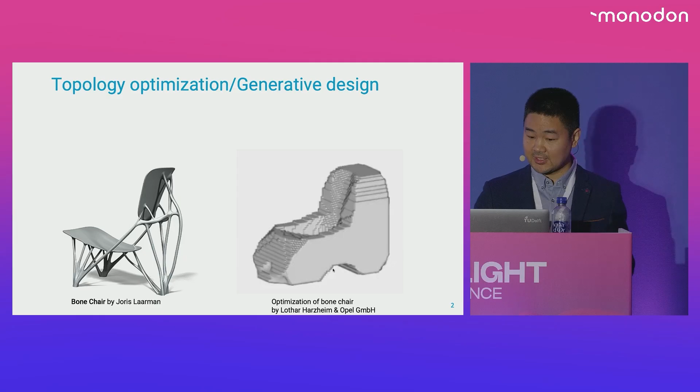So it starts from a solid block, and in this block, he identified where the forces will be applied when a person is sitting on top of it. And on the ground, he specified where the legs should be fixed. And starting from there, the algorithm, in an iterative process, removes material where it is less relevant. At the end, it comes up with a very beautiful organic design. Due to the similarity in the algorithm, to only place material where it is necessary, and also due to the appearance and the similarity to the bone, it is given the bone chair name.

So this is topology optimization, and increasingly in the past decades, because of industry players in this market, it is getting popular with the name generative design to highlight that the design is computed with algorithms instead of manually sketched by the designer or by incremental optimization. So it's a very good example of form follows function, where the function is the performance requirement and the form serves this function. What I find extremely beautiful about topology optimization is that it transforms the manual design process into a mathematical problem, and the mathematical problem is where to place material and where not to place material.

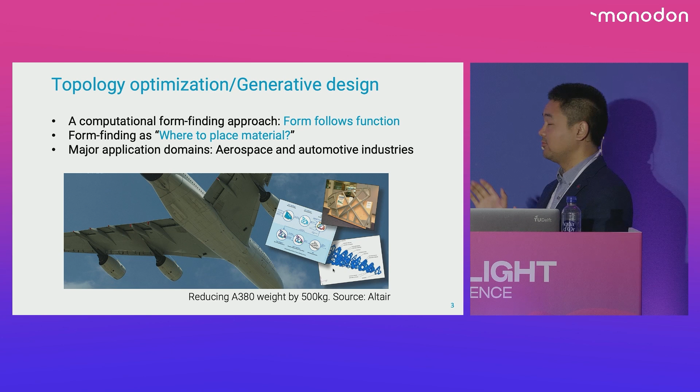These days, if you Google topology optimization plus additive manufacturing or 3D printing, you will find many of this type of organic shapes. They are all designed by this algorithm and produced by additive manufacturing. As Niels introduced, topology optimization has been under intensive development for almost 4 decades, but only in the past 10 or 15 years has topology optimization been really recognized by industry. One of the reasons is, look at these complex geometries, they are very difficult to produce, but with additive manufacturing, it becomes possible. Not without challenges, but it becomes possible.

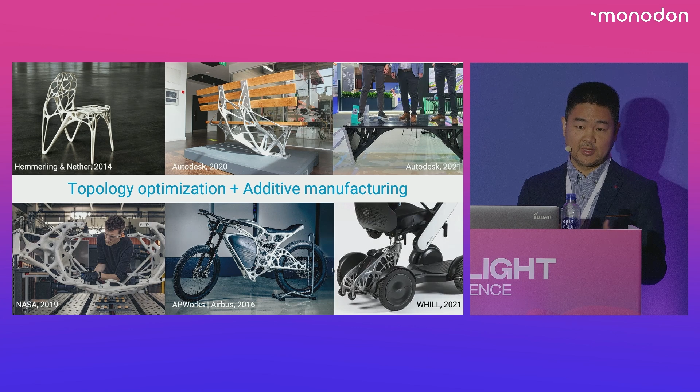If we zoom out from the mechanics part to the product design, we know when we design products, we consider not only the mechanical performance, but also many other factors. For example, how this product is going to be produced, whether it can be produced and how it will be produced, and what kind of materials. And today, let's talk about smart materials and how we can take these material properties into the design process.

And from an industrial design perspective, we also care about user experience. Do people like this design or not? For a component in a car, we probably don't care too much whether it is beautiful or not. But if it is a consumer product, let's say a chair, we do care about whether it is comfortable, whether it is beautiful.

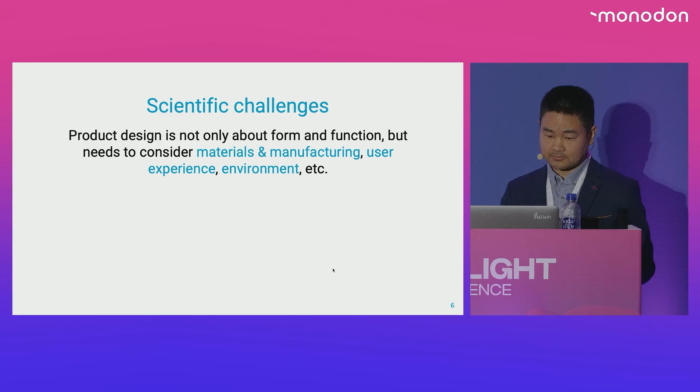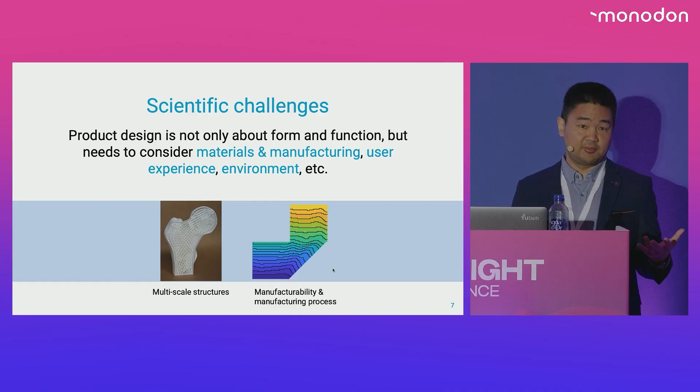My research has been primarily focusing on the design of hierarchical structures, or structures that are composed of microstructures, shown on the left, and this is a multi-scale structure, and also considering manufacturability, whether it can be produced in the intended quality. As two side tracks, I also work on high-performance computing, and here the intention is to support the development of this algorithm in 3D because it becomes very intensive. And the last one is about user experience, whether it looks good.

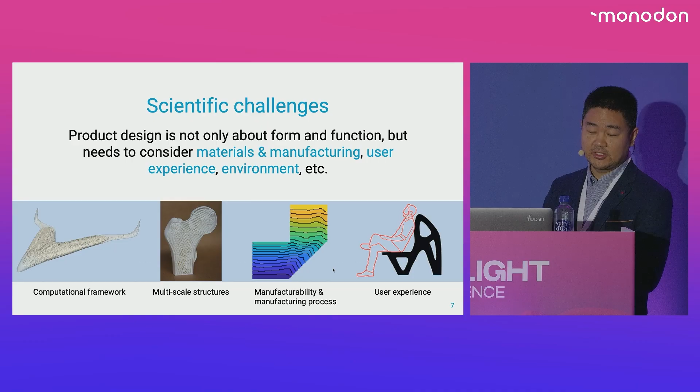So today I'm going to focus on manufacturability and manufacturing process modeling, but before that, I will quickly introduce the other three directions. The first one is about the computational framework. This video shows the computational design and optimization of an entire airplane. We are very much inspired by the effort to optimize the wing, but it's only half of the plane. So here we try to optimize the entire airplane.

And this opportunity is in collaboration with colleagues from the aerospace faculty. They designed a V-shaped blended vehicle. And here we test, if we have this different unconventional airplane layout, how should we design the internal structures? So here we developed this computational framework to get an understanding of how the structures in this V-shaped airplane would look.

Moving on to this human perspective. So here you see two chairs. One of them was designed with topology optimization, and the other one is a slightly modified version. The person sitting on top of it is the same. And my question to all of you is, which one do you find more beautiful? I see people pointing to the left, people left and right.

Yeah, so here, the one directly coming from topology optimization is the one shown on the right-hand side. And the left one is modified by our students who received training on aesthetics, and they know principles. These principles are very difficult to describe mathematically, but they have this understanding. Based on that understanding, they modify the shape.

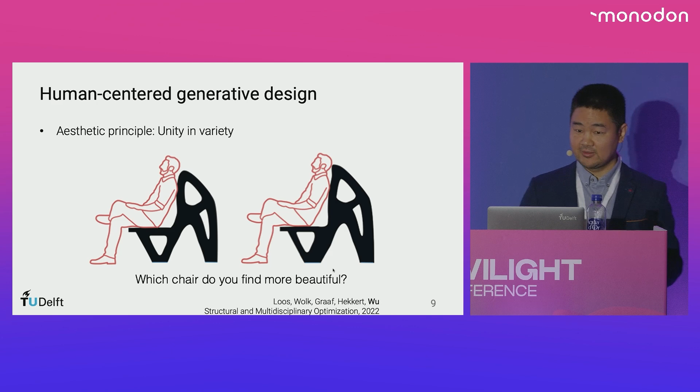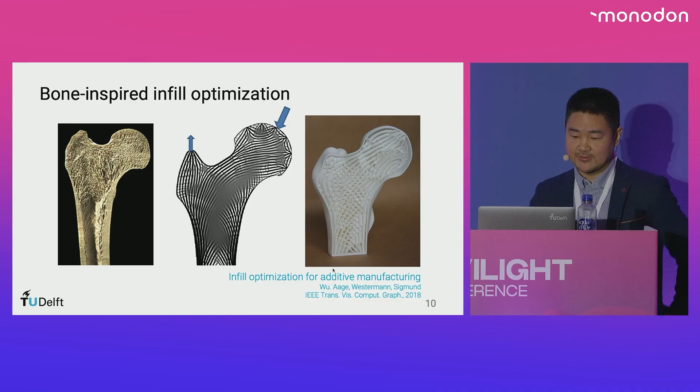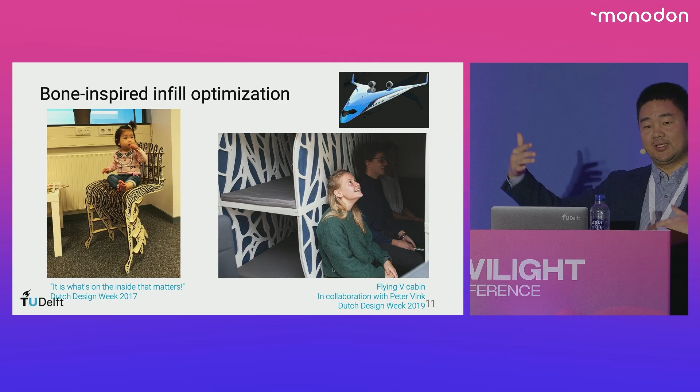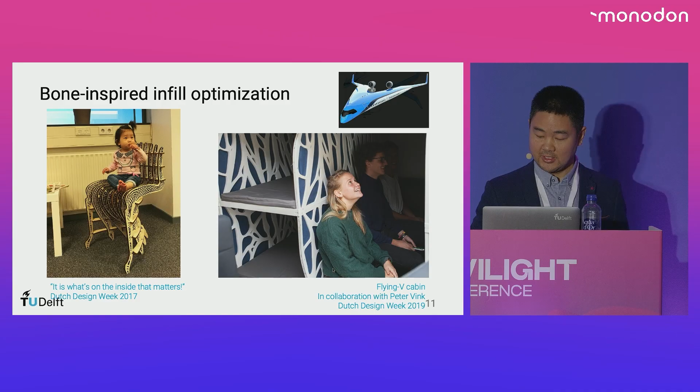It's totally different. On the right-hand side is the application of this algorithm to design the internal cabin of this Flying V concept. And it was exhibited at Dutch Design Week in 2019. In this infill optimization, we have to discretize the geometry with a very fine granularity in order to create detailed geometric details. It is computationally very intensive, so later we had been working on how we can use dehomogenization or geometry-based dehomogenization to more efficiently come up with high-resolution structures.

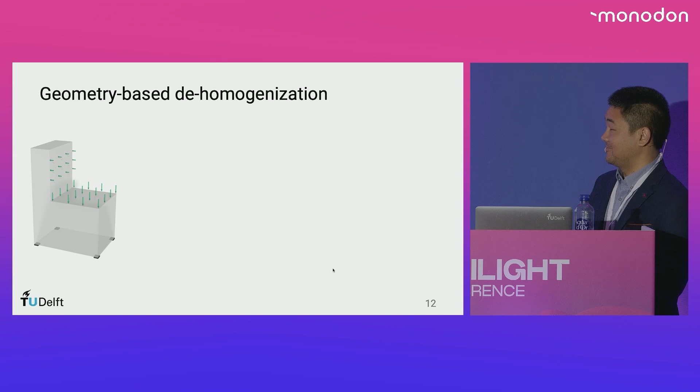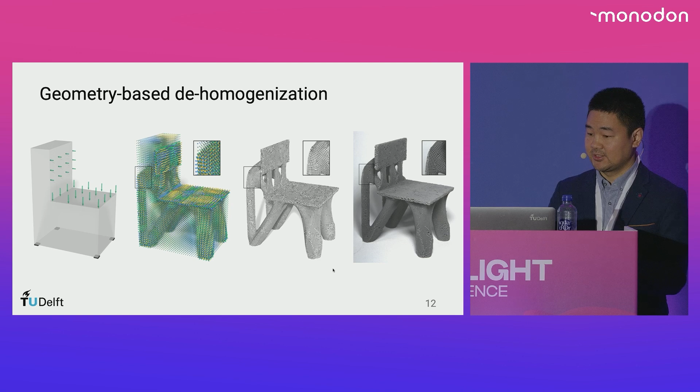Again, an industry design application of a chair. On the left side, it illustrates the mechanical boundary condition, and in the optimization, the optimizer tries to decide where we should place material, and if we place material, in which orientation it should be placed. And here we get a discrete field representing the orientation of cross structures. Then with geometric algorithms, we compile a continuous geometry from the discrete directions. And on the right-hand side is a fabrication with stereolithography.

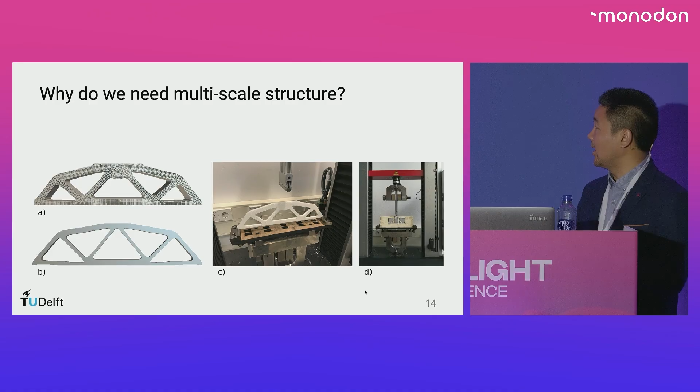An experimental validation on why we need multi-scale structures. So this is a 3-point bending test. On the left side, on the bottom is a standard topology optimization, which is solid, and on the top is this multi-scale or 2-scale structure. And on the right side is the setup of the mechanical test.

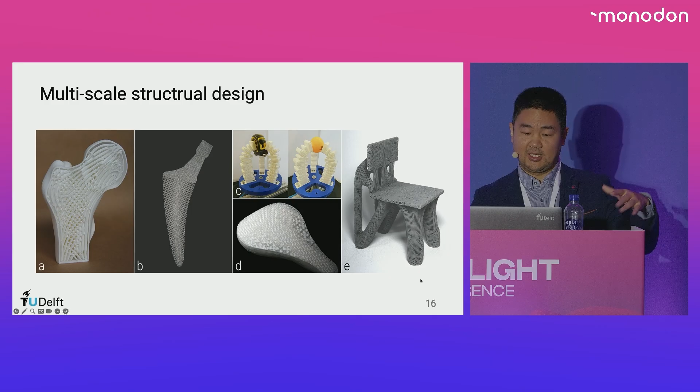Here are some more examples. The second one is the application of topology optimization to the design of an implant. So here we design microstructures that change porosity, and they are well connected. D is a bicycle saddle, where we have designed a geometry which can be printed with extrusion-based printing. On each layer, it is one slice, and across layers, it is self-supporting. And we also worked on a soft robotic gripper. I'll come back to that at the end of my talk.

Now move on to the manufacturing. Much of this research is inspired by recent advances in additive manufacturing, especially in robotic fabrication, where the robots have 5 or 6 degrees of freedom. It can deposit material almost arbitrarily. And this gives a lot of flexibility in the design process, but there are also some unique challenges.

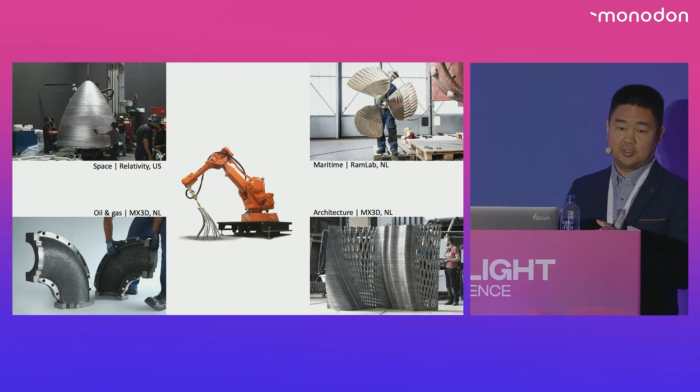So this robotic manufacturing process is a directed energy deposition process. It's called wire arc additive manufacturing. Essentially, it's a continuous welding process using robotic arms. It has been used to design components for industries where you demand large structures of 1 meter or several meters: architecture, space, maritime, and the oil and gas industry. And the Netherlands is pretty strong in this area, and there are 2 industrial partners in the Netherlands specialized in developing this large-scale manufacturing.

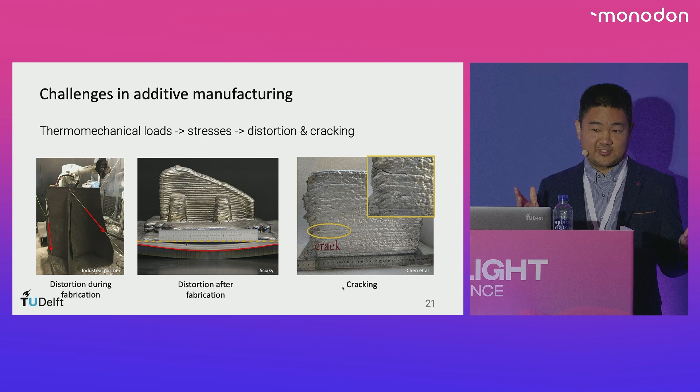It can create distortion, and sometimes this distortion can be so big, the manufacturer has to deform the shape back in order to continue the manufacturing process. And this residual stress can also manifest when the component is detached from the build plate, as shown in the middle. And if it doesn't deform, it doesn't mean everything goes well. It may create a crack or micro crack.

So if we look back into the design of the bridge, normally in design and manufacturing, these 2 processes are decoupled. By decoupled, I mean when we design something, we design a structure, and then we move on to manufacturing, and then we realize it couldn't be produced, or it couldn't be produced with high quality, then we return back to design and modify in order to make sure it can be produced. But even when it can be produced, it doesn't mean there are no defects.

In a manufacturing process, you could decide, should I go to this branch and then move on to the next branch, or should I propagate simultaneously across multiple branches? So there are many decisions, and this manufacturing process will influence the thermal history of the material, which will influence the material microstructure development and the residual stress.

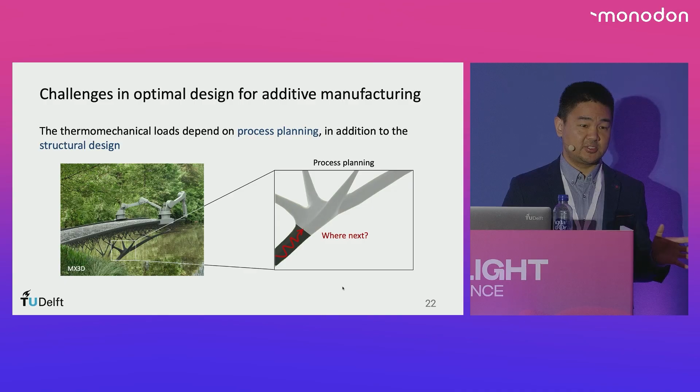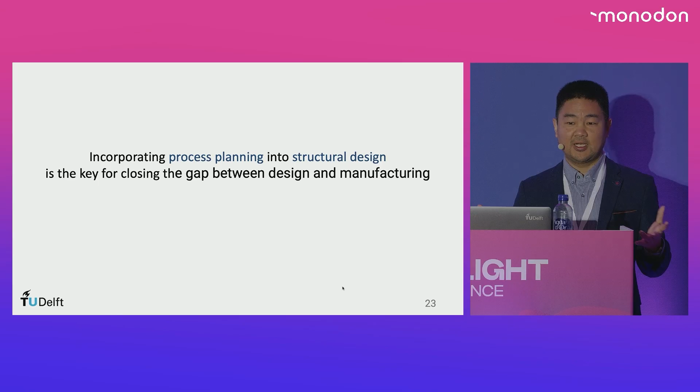Since this residual stress depends both on structural design and process planning, the question we asked is, can we incorporate this process planning into structural design? This is very difficult because if the structure has not been designed yet, how can we plan the process? So this is what we propose.

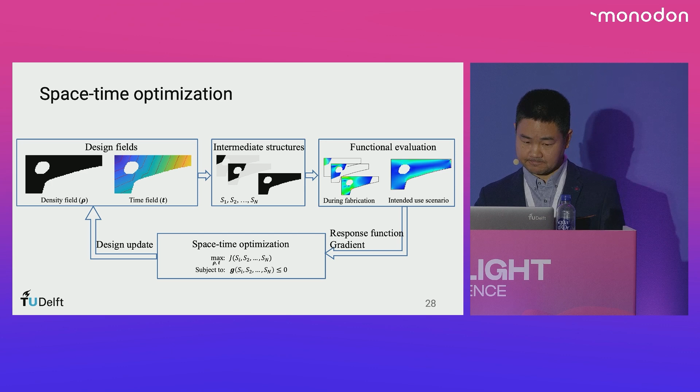More relevant for industry is to use this space-time optimization to address residual stress and distortion, which they are facing in practice. So here we are using this to design the sequence of a component in a way that after fabrication, the top layer should remain flat.

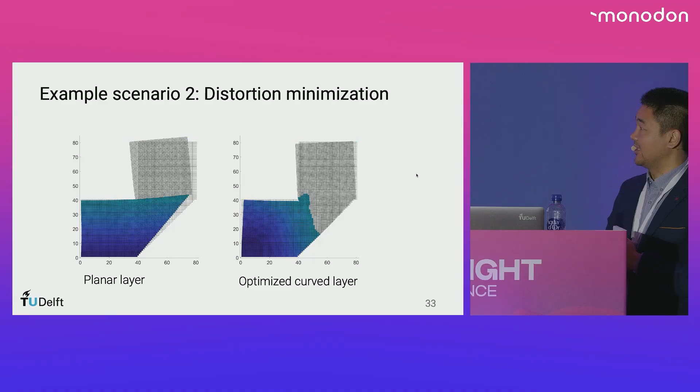Here it shows a comparison between typical planar layers and, on the right-hand side, the optimized curved layers. So there's a big difference in the amount of deformation if we fabricate the component in these two different sequences. And numerically, it is a 2 orders of magnitude difference in distortion.

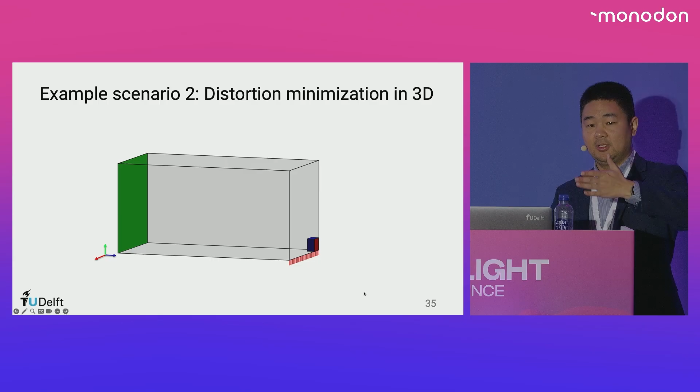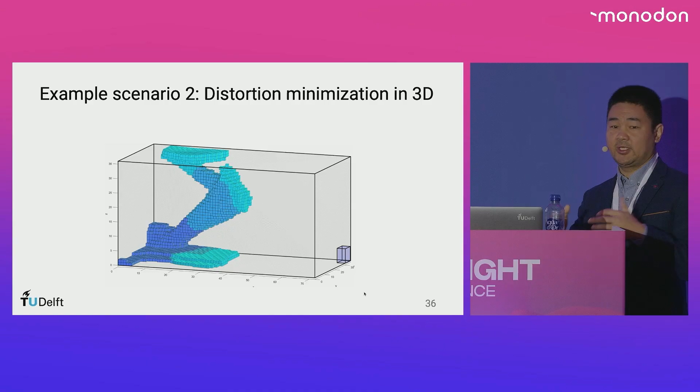Again, we have evaluated this algorithm in 3D with this component, where we are particularly interested in the right-hand side: there's a rectangular shape, and we want that shape to remain vertical. So this shows the fabrication sequence. And here we have prescribed the number of intermediate stages to be 10, and in the algorithm we can increase it to 20 or even to 100. That will give more fine control of the manufacturing process.

So, challenges ahead for this research direction: we are particularly interested in analyzing the convergence of this space-time optimization, where if we discretize into 20 layers or 100 layers, how does the optimized solution correspond to the discretization resolution? Whether it converges to something or whether it can improve even further as we refine the design and the time sequence.

Move on to the second one, specifically for wire arc additive manufacturing. For now, we are using an inherent strain model, which is computationally very efficient, but is known to be less accurate for predicting residual stress. So we hope to develop a more efficient and accurate model to represent the manufacturing process. And also, we have to consider manufacturability constraints.

So we are exploiting the fact that the robotic arms can deposit material almost arbitrarily, but in practice, industry prefers to have constant process parameters for better control of the material microstructure. So we are trying to incorporate geometric as well as process-related constraints into the simulation and optimization.

The computation is intensive, so we are also working on extending this to 3D and using a hierarchical approach or multi-resolution approach for representing the sequence and to accelerate the optimization.

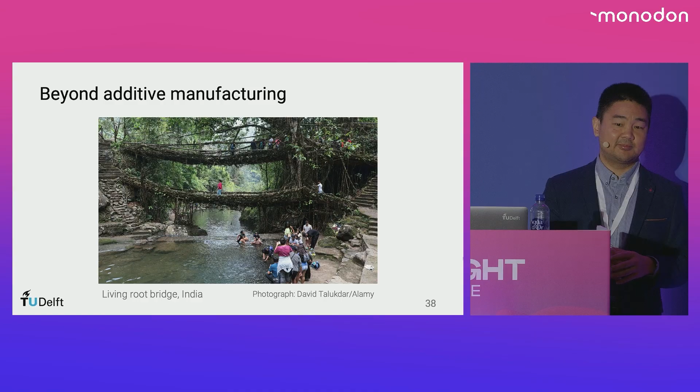The question is, how can we take into account the sensing and actuation and the growing of the material properties into the design process? I find this very interesting. A last slide before the conclusion.

Besides topology optimization, I have also worked on soft robots with PhD as well as master students. On the left side is a soft gripper designed by Robert Scharff. He's now an assistant professor at Hong Kong University. We didn't apply topology optimization yet because we spent a lot of time to understand what the requirements are for soft robots. In topology optimization, if we can measure the objective function, there's no guarantee, but it's very likely we can do something with optimization.

But when we move on to applications, it is more challenging for us to understand how we quantify the performance. For example, in the soft gripper, we want it to be stable, but it took us quite some time to understand where the stability comes from, or where the instability comes from. So this video shows we redesigned the structure, not by topology optimization, but by engineering design, in order to improve the grasping stability.

Let me see how I can. The video is pretty. Well, it's a 2-minute video. I will just show part of it. So I will.

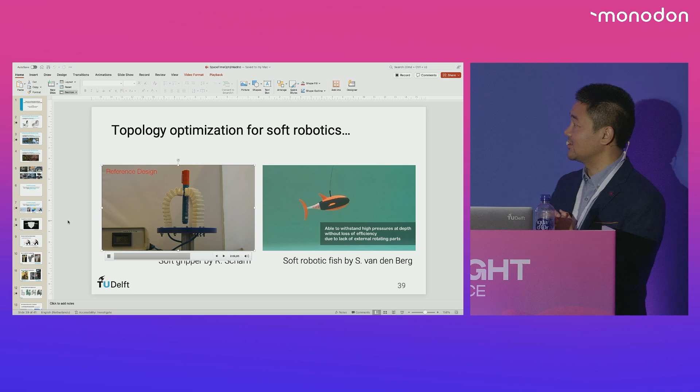So this is a standard gripper actuated pneumatically, and this is an improved gripper where the stability is improved. The reason for instability in this case is these soft fingers are easy to bend. We want them to be easy to bend so we can easily actuate them. But when they are too flexible, they can also twist. Human fingers don't twist, but soft fingers twist. So we designed a stiffener to prevent the twisting while not affecting the bending behavior.

On the right side is a graduation project by Sander, a very talented master student. He designed this soft robotic fish inspired by tuna, because tuna is known to swim really, really fast. So by mimicking the movement and by innovating the actuation process, we are able to achieve very high speed; in relation to the size of the fish, it was the fastest. It can swim 1 meter per second. And this design is made open source, and it has been reproduced in some other institutes around the world.

Conclusion and final remarks. The time dimension introduces some new challenges and interesting research questions for topology optimization. The time dimension can be related to the manufacturing process, to the growing process of living material, or to the time-dependent actuation of materials. And we have conceptually validated this space-time optimization framework by designing the structure and at the same time planning the fabrication sequence. There is a lot of future work waiting for us to build a more accurate additive manufacturing process model, as well as experimental validation.